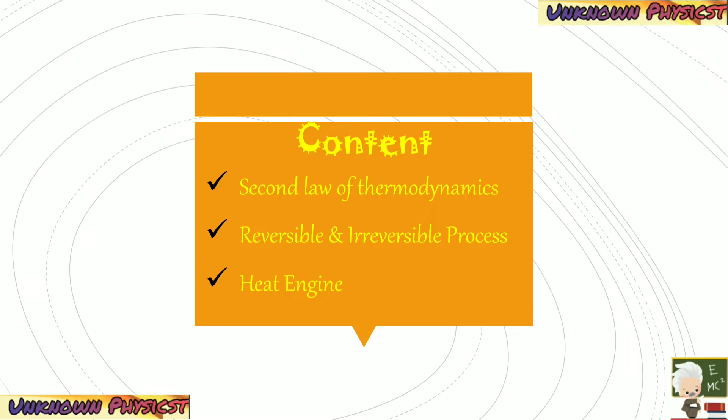Please do watch it. So the topics we are going to cover today are second law of thermodynamics, reversible and irreversible process, heat engine. And our first topic is second law of thermodynamics. It's strange because it does not tell us what happens or what can be done, but it tells us what cannot be done. There are many scientists who have done experiments and given statements based on their understanding.

Let us discuss the statements given by two prominent scientists. So the first statement is the Clausius statement. It is impossible for a self-acting machine unaided by any external agency to transfer heat from a cold reservoir to a hot reservoir. Just look into the diagram.

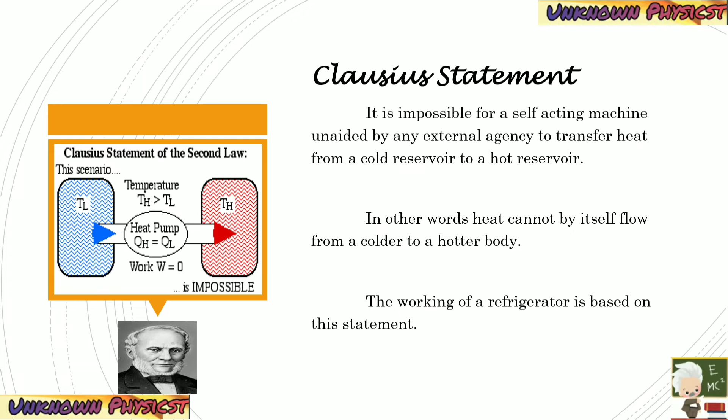There cannot be any device that spontaneously delivers the energy from lower temperature to higher temperature. The work done is zero. But according to the Clausius statement, there cannot be a device with work done zero. So in other words, heat cannot flow from a colder body to a hotter body. The working of a refrigerator or a heat pump is based on this statement.

So the next is the Kelvin-Planck statement. It is impossible for an engine working during a cyclic process to extract heat from a reservoir and convert it completely into work. So just look into the first figure. Here all the heat taken from the source Q1 is converted to work done completely and there is no heat rejected to the sink. Whereas in the second figure, the heat taken from the source is converted to a partial amount of work done and a little amount of heat energy is rejected to the sink.

So 100% conversion of heat energy into work is not possible. That is, efficiency can never be equal to 1. 100% efficiency is not possible. So the working of a heat engine is based on this statement. That is, a perpetual machine, a machine with 100% efficiency, doesn't exist.

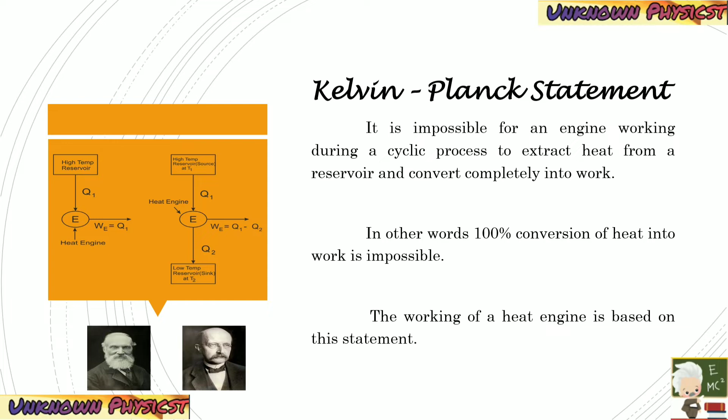Our next topic, reversible process. A process which can be retraced back in the opposite direction in such a way that the system passes through the same states as in the direct process and finally the system and the surroundings acquire the initial condition. Examples are fusion of ice, vaporization of water, gradual compression and extension of a spring.

For example, here I have taken mango juice in a tumbler. It is in liquid form. Now I am cooling it, I will get mango ice cream. But I want to drink mango juice. If you heat it, you will get it. You are retaining your initial condition. So it is a reversible process. There are many more examples.

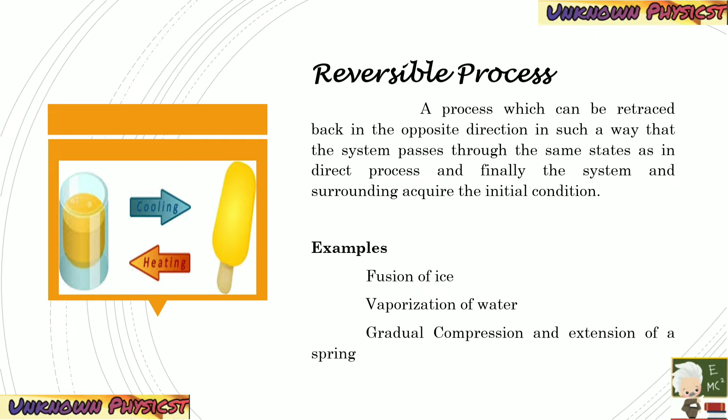And the next is irreversible process. The process which cannot be easily retraced back in the opposite direction is called irreversible process. Example, work done against friction. For example, imagine you are hungry. So you have an egg. Now you are making an omelette with it. After some time you don't feel like eating. Will you get back your egg again? No, right? So this is an example of an irreversible process. So this is about reversible and irreversible process.

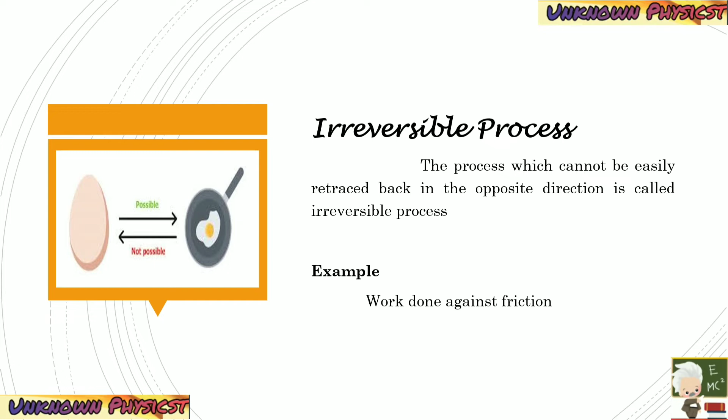Our next topic is heat engine. So a heat engine is a device used to convert heat energy into mechanical energy. Usually it is an exchange between two temperatures, a higher temperature and a lower temperature. For conversion of heat into work with the help of a heat engine, the heat engine should contain the working substance which absorbs heat and does the work.

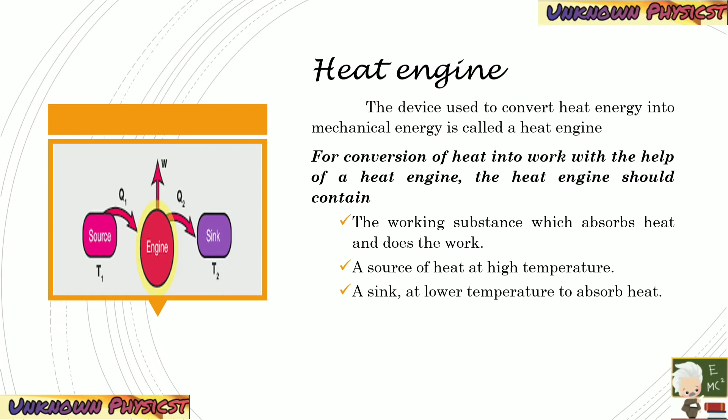The reservoir from which the heat starts to flow is called the source, and when some amount of heat energy is rejected, it is received by the sink. And energy always flows from a higher temperature to a lower temperature. For example, let us take a coffee cup filled with hot coffee. Initially your coffee cup will be cold, but the coffee inside will be hot. So the heat will transfer from the higher temperature to the body at low temperature, that is from the hot coffee to the cold coffee cup.

Another example, let us take a balloon filled with air. Now I am making a hole in the balloon. The air from outside doesn't go inside, right? The air from inside comes out. So from higher pressure it comes to the lower pressure.

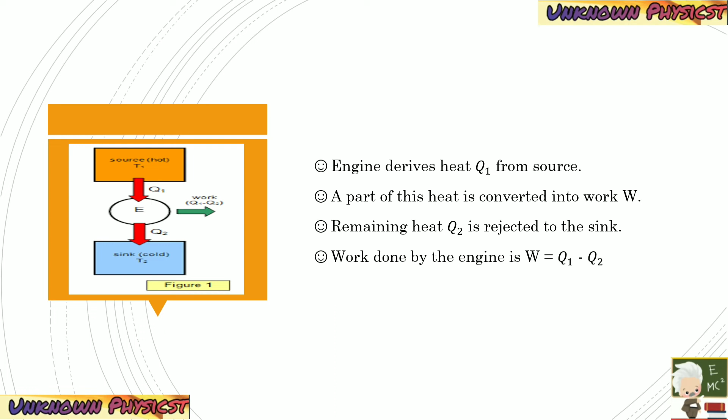Let us look into the working of an engine. The engine derives heat Q1 from the source and a part of this Q1 is converted into work and the remaining Q2 is rejected to the sink to maintain an equilibrium. That is, the total heat Q1 should be equal to work done plus Q2. So the work done by the engine will be W = Q1 - Q2.

Next is efficiency. Efficiency of the heat engine is the ratio of work done by the engine to the total heat supplied to the engine. So I am representing efficiency as eta HE, HE for heat engine, which is equal to W by Q1. Work done is nothing but Q1 minus Q2, by Q1. So it will be equal to 1 minus Q2 by Q1. That is also equal to 1 minus T2 by T1.

And your efficiency is always less than 1 and it can never be equal to 1. That is possible only in ideal cases. So when you are subtracting some fraction from unity, it should obviously be less than 1, right?

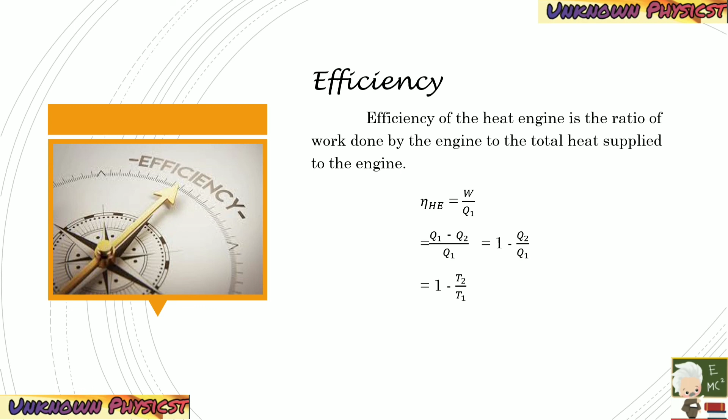That's it for the day, guys. So today we have looked at the second law of thermodynamics, reversible and irreversible process, heat engine and working of a heat engine. In my next video, I'll be doing the Carnot cycle and how a refrigerator works.